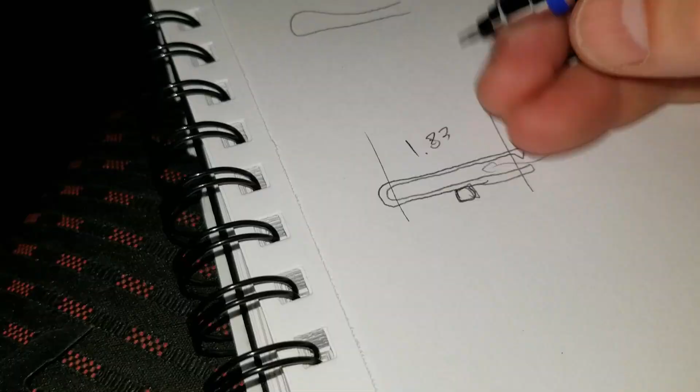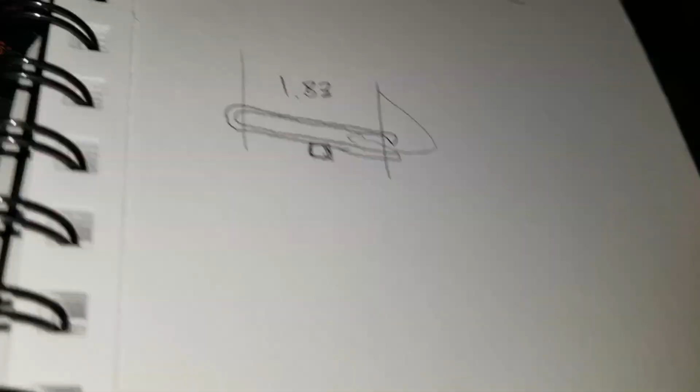That's the plan. So this inside width here needs to be 1.83. What is that, needs to be... oh, let's find my pencil. The lead broke. I know there's a piece of lead in there because I can hear it bouncing around, but it just won't take. So okay, the middle here needs to be 1.83 inches.

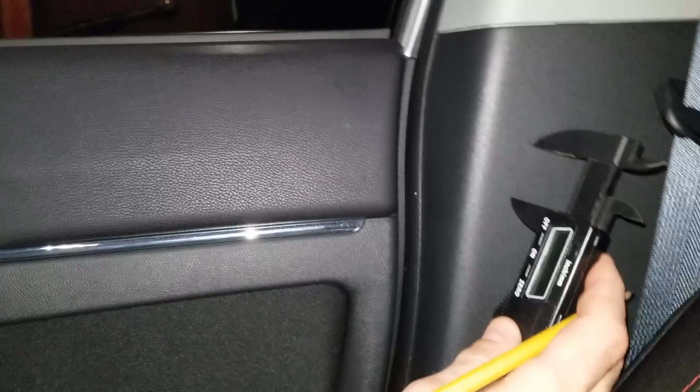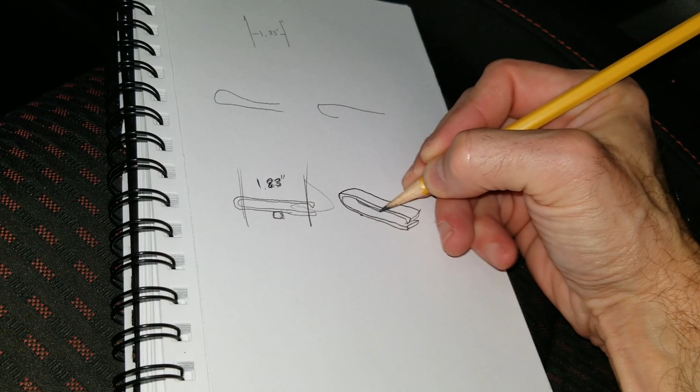So taking that, I can elaborate on how big I need it otherwise. I do want it to be a little wide, but not obnoxiously wide. So we'll go for the width, let's do a little 3D representation. Drawing like this is very weird. Okay, so yeah, let's say, there we go. So this width will be 0.6. Okay, I think I can work with that.

That's all I need. Set up my green screen so I can make this a little cooler. Alright, here we go, lighted set. Alright everybody, here we go, let's get this program loaded up.

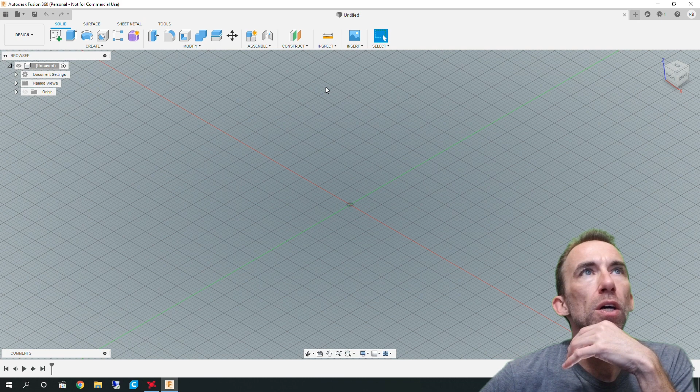Oh man, must not have been signed in. Man, this capture running, everything's running slow as shite. Alright, here we go. Here's my little booklet with my sketches on it, my measurements.

We have 1.83 inches for the interior. I'll make it an eighth of an inch thick, which is 0.125 inches, so that will be the thickness of the plastic. The gap in it doesn't need to be a lot at all because the seatbelt is really thin, so I'm gonna make the gap 0.20. As the tolerance levels, we'll make it 0.05. So let's see here now.

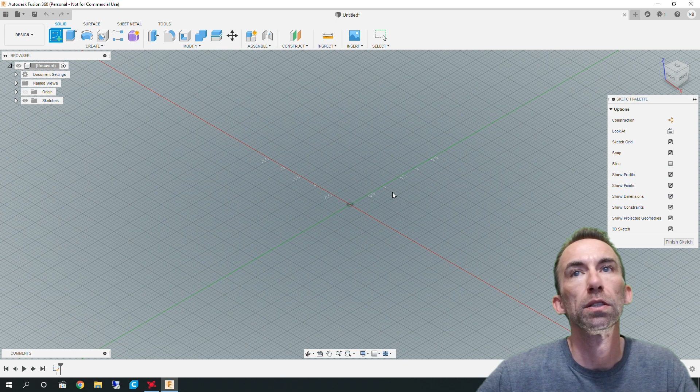I'm going to design this from the side, so we start off with create sketch, go from the top view. I just want to point out that by no means am I an expert at Fusion 360 or CAD for that, whatever, so just take that as you may.

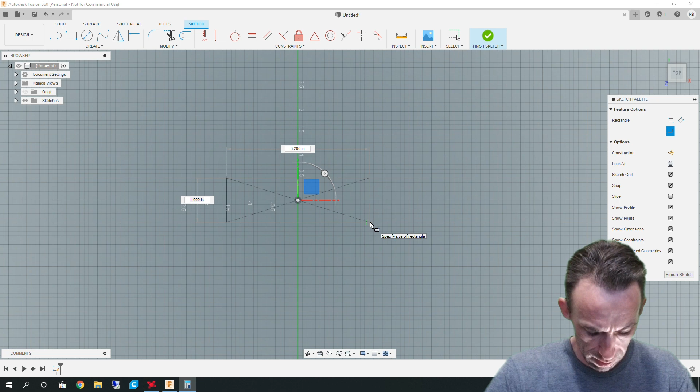So in fact, I'm going to use a calculator for this. Got 1.83 plus 0.05 plus 0.125 plus 0.2, so 2.205 is the total length of this. So I'll switch to this 2.205.

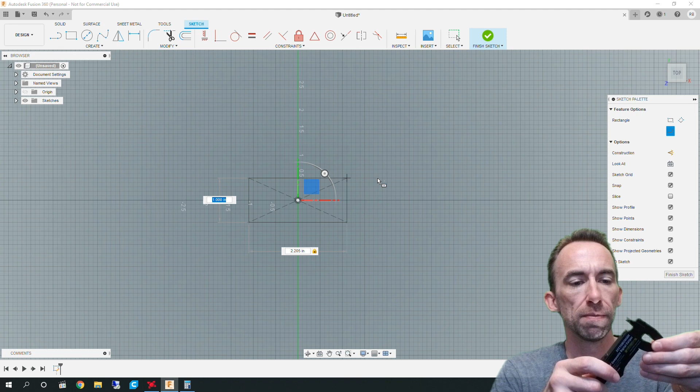You know the width, I never really determined the width. I know the seatbelt is probably about that thick, it's probably 0.125 inches, or an eighth of an inch, probably a little less than that. So we can make the width of this a quarter of an inch. Yeah, we'll do that. Alright, so let's zoom in on this. Okay, so there's our basis for it.

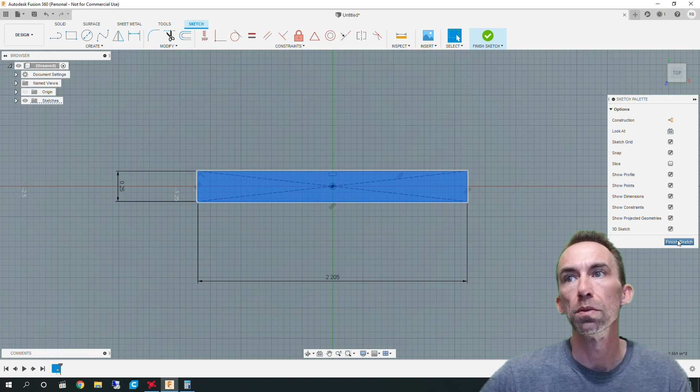Now what we need to do is finish that, then pull this up. 0.60, that's the width of it. Go back here, create sketch, go back to the top, rotate that back around. I don't think it really matters.

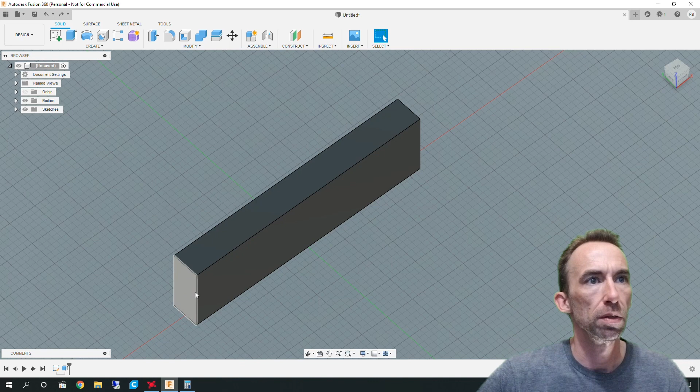Okay, actually I shouldn't have done that. Why does this look like it's backwards? Let's take this edge and this edge, and fillet them in so we get a little rounded edge like that. That looks pretty good.

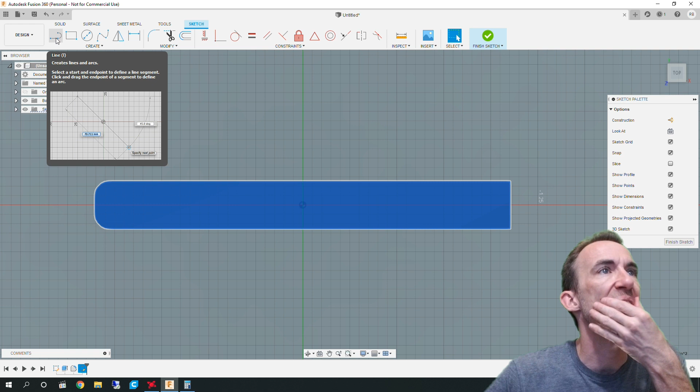For this end here, I'm not going to worry about it, I want that end to be flat. Would it be better to cut a hole, or hollow it? Oh, the thickness is 0.125, an eighth of an inch. We use fractions, and I know how to work. Anyway, I'm just gonna go ahead.

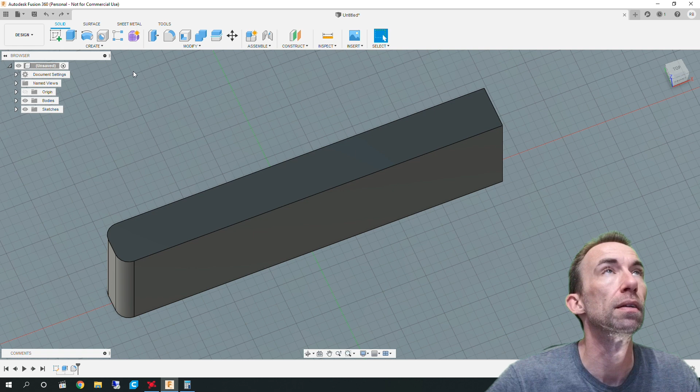Let's just not do a sketch there. What I'm going to do instead is a shell on this. Really? Is that what we're doing? We do all of this. I'm gonna shell it 0.125.

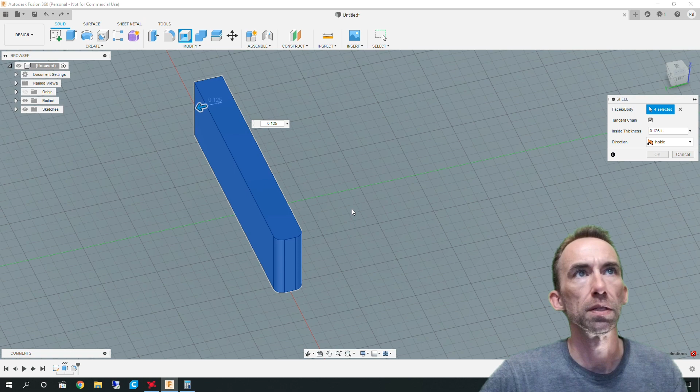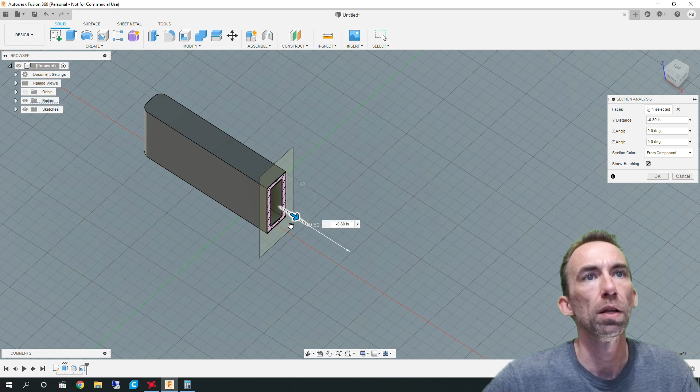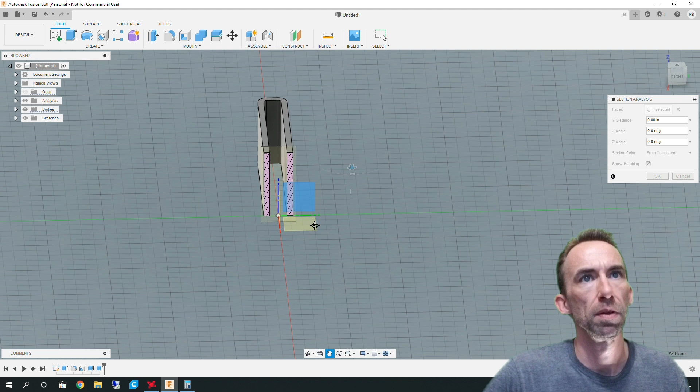All right, now what that did, I can show you by doing this and then selecting this, and then if we do this, you see it's now hollow. So all I really need to do now is come in here like this, select this, extrude it negative, it'll cut it, and same thing for the bottom, extrude it negative, it'll cut it.

Now if we go back to section analysis and select this plane, we can slide this back out and we have a hole. There's probably an easier way to do that, but since I didn't really know how I wanted to start that off, I thought that was the best way.

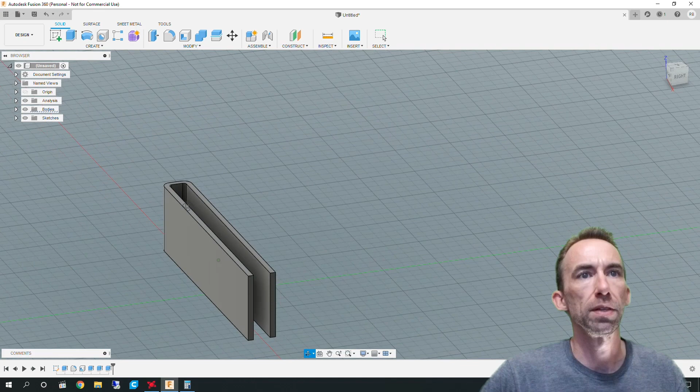Don't do that, we need to move that stuff back. So let's go to the front. All right, so right now there's our little clip. Now we're going to have to create a sketch on this plane here. Go to the corner here, corner there.

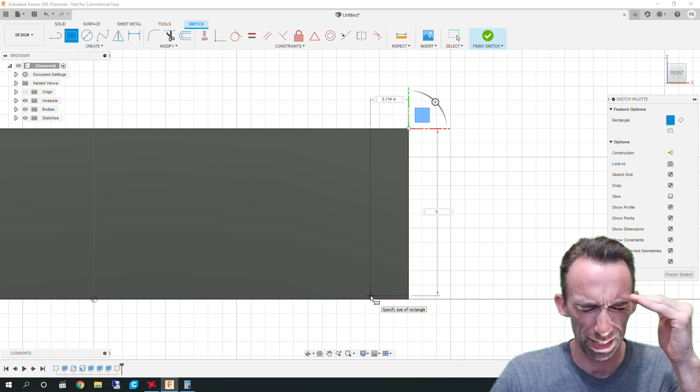This needs to be... we allow 0.2 and 0.05, which is 0.25, which is 1/4 of an inch. Let's leave it at 0.5. There's a tolerance on this printer because I'm not going to print this in fine quality, so I'm trying to take that into account. It overprints by about 0.005, I think.

I want you down there. I think we're fine doing a 0.20. That's kind of, well, it looks big on here, but it's not. It's less than 1/4 of an inch.

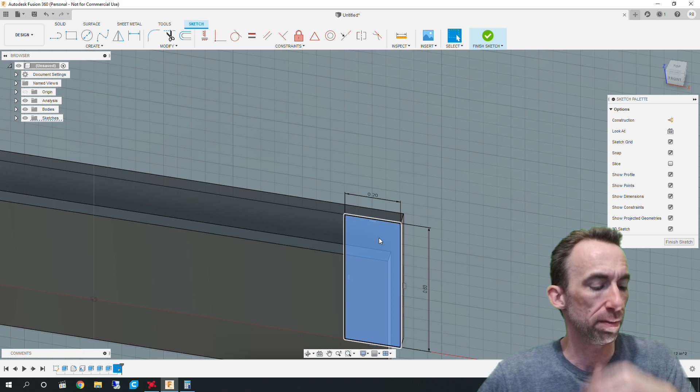Oh, I know what I should have done. I don't need to do that, I can leave that there though, that's fine. Let's finish sketch. I didn't need to do that, I could have done this. I don't know what I'm thinking. This would have fixed everything.

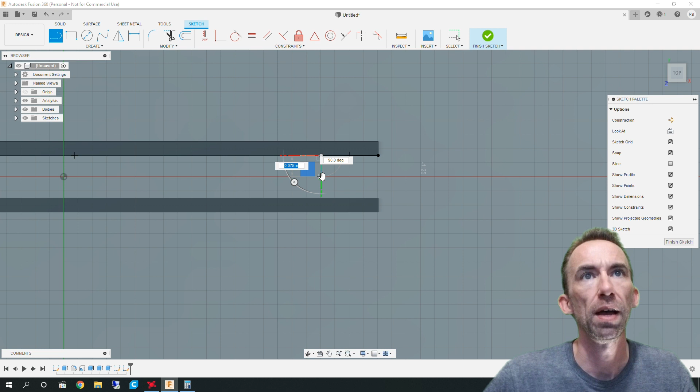So what I'm gonna do is create a line back here, 0.2. I'm gonna come up here, about half that. Oh, I hate it when it does that, I clicked on the freaking... okay, that's half the distance.

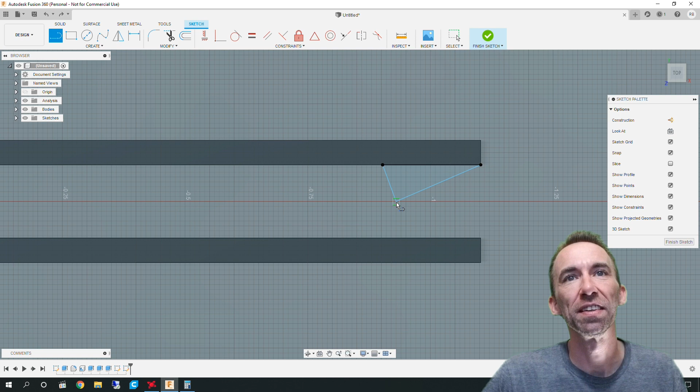You can see the total distance here is just over 1/8 of an inch. So we want enough room that you can get the seatbelt back out. Here, what I would do, we're gonna go to the same point here, up to the same point here, and then this we're gonna take all the way back.

Okay, so now I kind of have a little tiny spot. I have no idea how this is gonna work. It's pretty small, so it shouldn't take too long to 3D print. I'm really gonna unselect it, bastard. No, I don't want to select that, I want to select that.

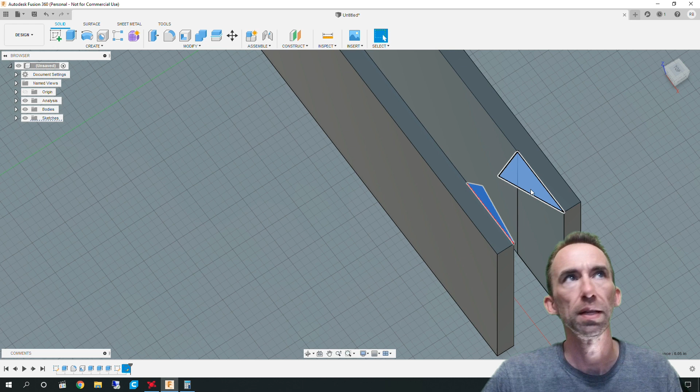Now if we extrude this down to the bottom there, enter, we should have a perfect little clip shape. Yay! I don't know how I'm going to mount it yet.

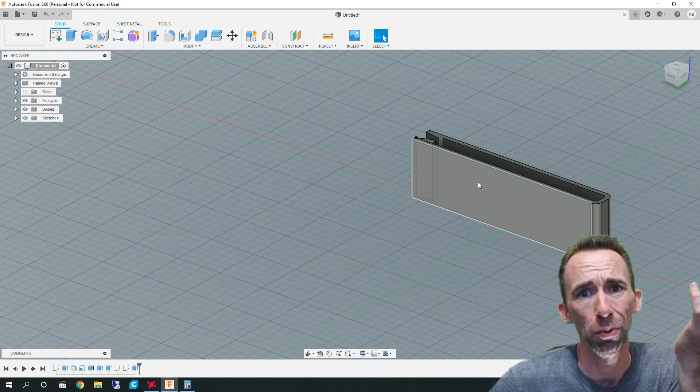Probably some double-sided sticky tape or something, something that if I want to take it off—which I don't know why I ever would—I could use like some gum-off or whatever that crap's called, or some rubbing alcohol, and get it off without hurting anything. All right, so there's that.

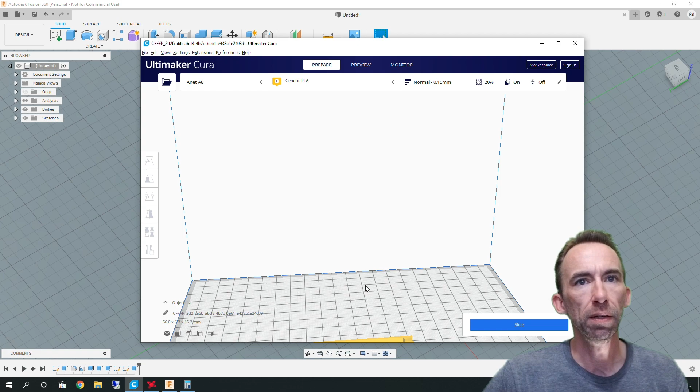Let's see how long this thing's going to take to print. It's been a while, 3D print. I already have it set up in my Cura. All right, here we go, there it is in Cura. This Cura is already set up to everything, which right now is set to normal.

So we'll see what the normal setting of 20% infill does, which I don't think it's going to infill this at all. Slice it up—it says 19 minutes to print. Okay, taking that into account, I'm going to go to fine.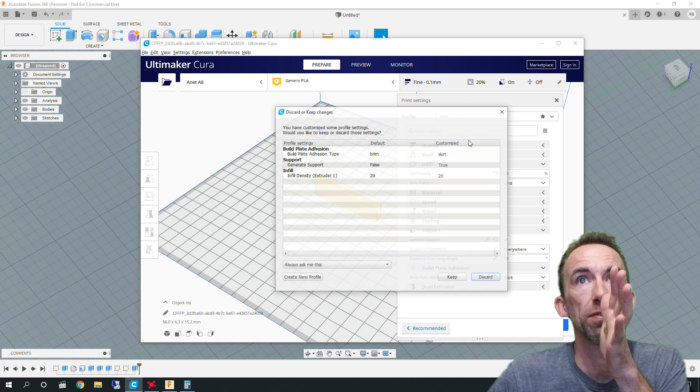Yes, I'll keep all that. Slice that up. Okay, 35 minutes. So zoom in here. Basically what you're looking at is the way it's going to lay everything down.

So this program is really cool. All right, let's get the 3D printer set up.

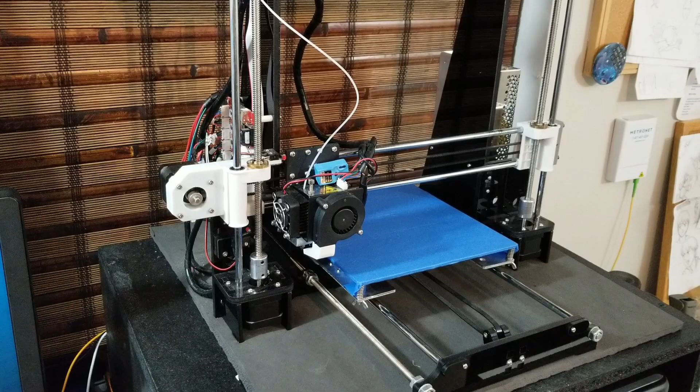Okay, welcome to my 3D printer. I always keep this loose because when this belt is tight, it puts stress on this end cap, this support piece here, and kind of bows it. So if you leave it tight, it will permanently bow it.

There's a thing you can print that takes like 13 hours, and I'm like, yeah, I'm not even going to do that. That goes into a big brace. I could probably make one that doesn't take 13 hours to print. That would work just as well.

I got to switch this out for black. In order to do that, I have to preheat.

Actually, looks pretty good. I don't think I'm gonna bother with leveling it. It should still be level because I haven't touched it.

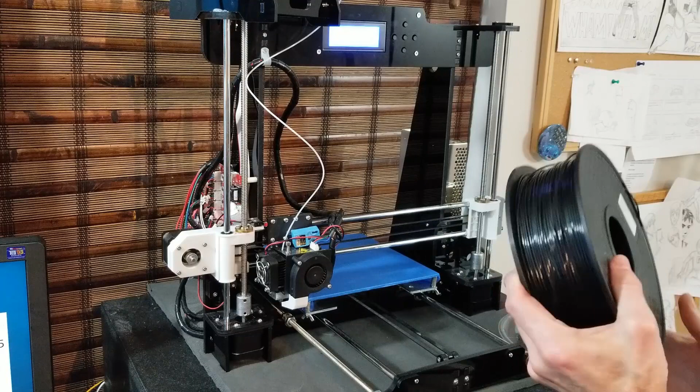Got to preheat for PLA, which is what this stuff is. I do have some ABS, which honestly is a little better to use, especially if you want a more finished look. It prints at a higher temperature, and it literally makes your entire house smell like you're burning plastic with a soldering iron. So I don't use that unless I can open the window and put a fan back there. That's the only time I use that.

If we go back to the home screen here, it will show us the current temperature. When it gets up to about 100 degrees Celsius... alright, it's 129 now, so it should be enough.

Should be able to push a little bit on this, pull it out of there. Now you do not want to let go of this, or it will go freaking nuts on you and tangle all to hell. Now I 3D printed these so that it would sit on the spool easier and roll, because for some reason they decided to put gaps in there.

So I gotta get my tools so I can get that off. Put back on the holder, which I still have not built the filament holder over top of this. That's okay. Well, there you go.

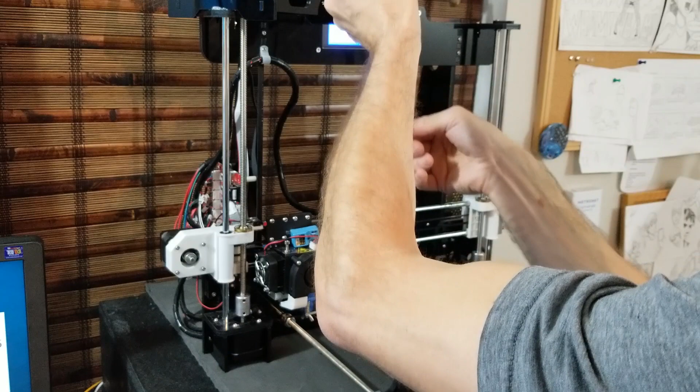Ow, ow, ow! Don't touch it. Shit. There's a nice little blister.

It's 191.6 degrees Celsius right now, so it's a little warm. Just push until you see black come out of the extruder.

Alright, here we go. Next thing I gotta do is copy my file to this. Okay, file is on here.

Alright, so we need to go to SD card now. Need to unmount, remount the card. Print file. Scroll down to see our seatbelt clip. Start printing. Here comes the fun part. You just wait and pray.

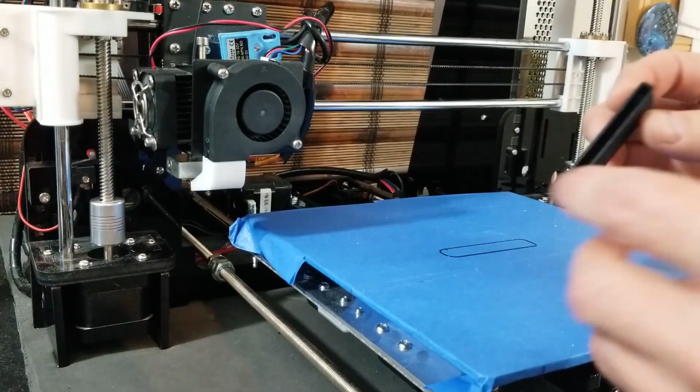Alright, it is done. Should probably let it cool a little more, but I'm going to pop it off of there. There you have it. There's our little clip. You can see the little clip on the end.

Should work. Should be able to put it in there and pull it right back out. Doesn't look long enough, but believe it or not, that's wider than the seatbelt.

Okay, I have a few options for attaching this to the car. I can either tape it, I could glue it, or I have some Velcro command strips, actually. I have a bunch of these. You know what? I'm gonna do that. Let's do the Velcro strips.

Okay, we need to cut one of these in half. I don't need one that long - that wide, I should say. I don't know how this is gonna look with the Velcro. Honestly, I can tell you right now, I'm probably gonna hate it because it's probably gonna stick out too much. But who knows? It might work. So let's go put it in the car and see how it looks.

All right, there's our seat belt. If you could see, my arm wasn't in the way. It clips on there very nicely.

Real question is, where do I want this? Honestly, I kind of want it up high, like there. I think that would be the best spot to keep it from flapping. Put it on there, let's press it really hard, make sure it stays. Seems to work really well. Grab the seatbelt pull, there you go.

But is it enough to keep the wind from wreaking havoc on it? And I just noticed that this little piece of plastic is awfully bendy. At least I didn't know it was going to bend out that far with the pressure of the seatbelt. So I'm going to let that go and give it a shot and see how it works. I mean, right now it's good. Looks like that plastic's actually flexible enough that it won't break anyway.